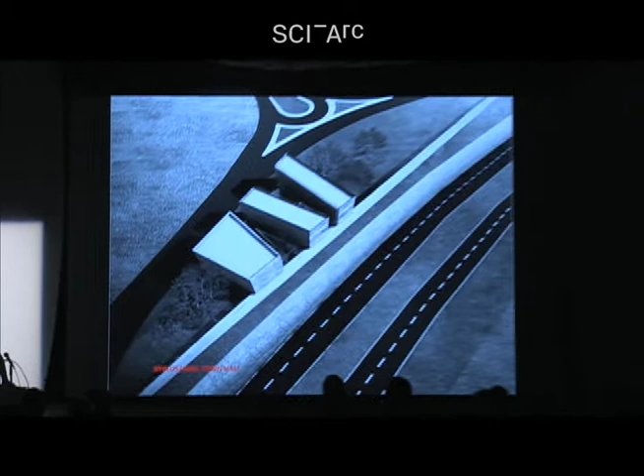In 2012, we won a competition for the design of the town hall of Byblos, a city just north of Beirut. The competition was open, it was anonymous, and it was in black and white—because the jury, consisting of deans of different universities, decided that in order to make it a fair competition, and fairness usually means equity socially and economically, printing in color would be expensive, so making it in black and white would allow everybody to participate. Indeed, it was an unusually popular competition.

But what I would like to do today is describe how the building went from black and white to color, and how it went from being a project to becoming a building.

Along the way, I would like to reflect on how a building relates to a larger practice, how a practice evolves building by building, and how the premises of such a practice are incrementally articulated and revised to solidify slowly into something like grounds, as perhaps the only certain grounds for practice.

Architecture itself provides the image of stability and permanence, but set in uncertainty, architecture becomes a stabilizing presence, or to borrow from Paul Bowles, perhaps more like a sheltering sky. Its success is based on how it calibrates its attachment or detachment from the earth, how it times its anachronisms, and how it measures the displacement of what it proposes as forms of space against the forms of life, in order to contain them, but also transform them.

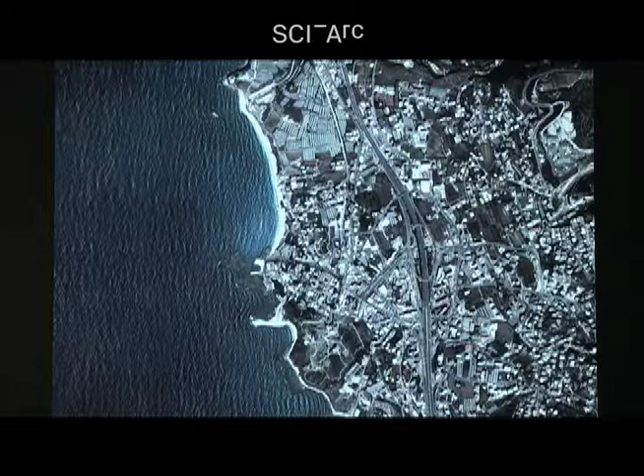For us, working in coastal cities along the Mediterranean, especially in Lebanon, has been quite frequent, and it has always brought with it exceptional and sometimes very difficult site conditions. Sometimes we were involved in the selection of the sites, but the choices were not always ideal.

One such difficult condition of site was the housing for the fishermen of Tyre, a historic city, World Heritage Site like Byblos, a peninsula along the Mediterranean, where the fishermen were forced to move out of the historic city in order to get better housing. They formed a cooperative and built their housing along the edges of agricultural fields. I was involved early on, so I got to help in the selection of the site, but the choice was mostly in this area.

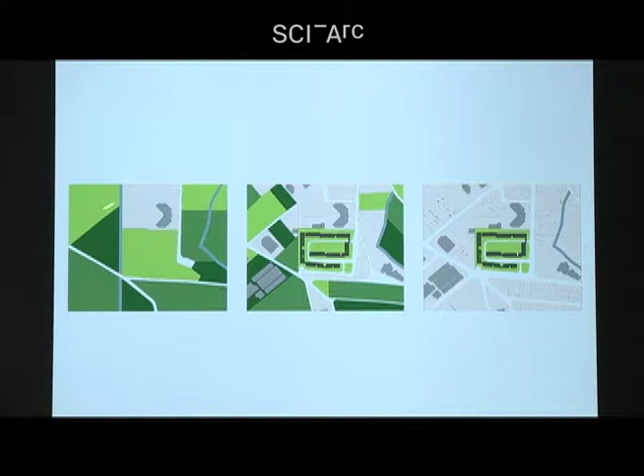In this case, we worked with the planning authority to go from the tobacco and radish fields that were there to a project that would be planted as a precursor to future development they were planning for the area. The hope was that the building would capture the grain of the agricultural fields long after they are replaced by buildings of a very different size and grain, but also create moments at the intersections of public activity outside and common space inside that preserve, in a way, the grain of the agricultural terrains.

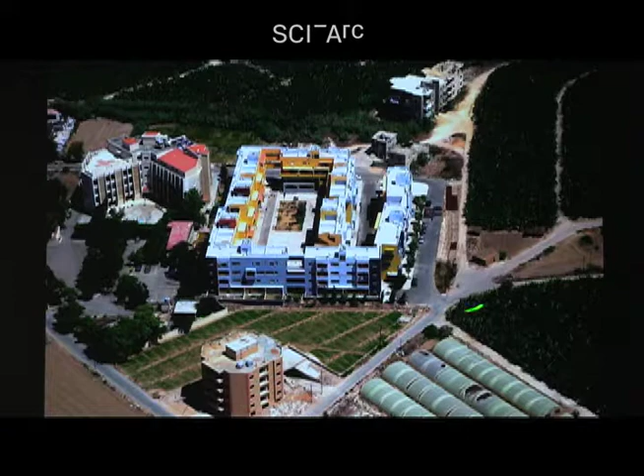Somehow the conditions around the site remain the same, with some development precariously growing everywhere, but the road network that was planned has yet to be developed. Even though we understood the space to be a common ground for the community of fishermen and the neighborhood around, it has yet to live up to that expectation.

The shop around the corner works quite well in capturing crowds from inside and out. The space inside has become more of an activity for kids because they're quite well connected, but really the better social activity happens in the gaps, the interstices between the buildings, where the fishermen hang out, mostly in the afternoon, preparing for the fishing at night.

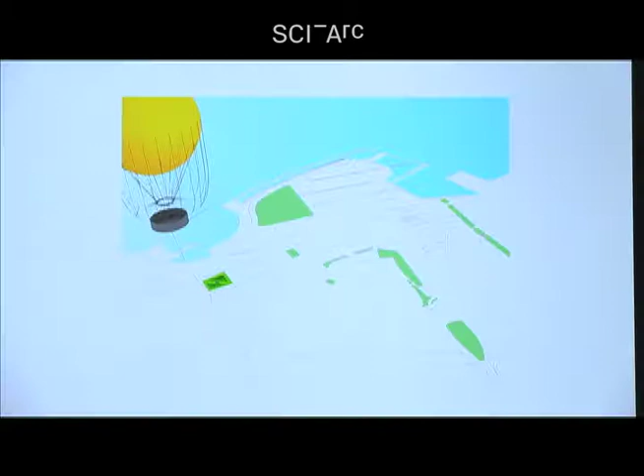Another moment where the site selection was very difficult was for a temporary park for a balloon landing on the edges of Beirut. Here we were given a choice of several sites. These would be temporary, for activities like cycling and horseback riding, as these parcels were being built and turned into towers.

On this site, for example, now there's a tower by Herzog and de Meuron going up. But the idea here again was that we would capture the possibility of public space for a short period of time, even though it's temporary, and create with the slope an articulation of the geography of the site that would highlight these difficult conditions, the idea of a layered earth, and the possibility of pulling in crowds and creating a big public space. For a brief moment of time, that worked.

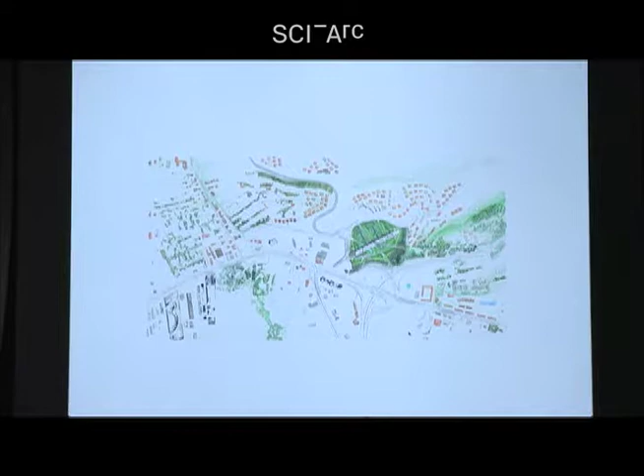But somehow, even here, the conditions of publicness were quite vulnerable. It's a vulnerability that I carry with me as a kind of fear in the project of Byblos as well. In both projects and in Byblos, there's also this tension between the ground and the building on top.

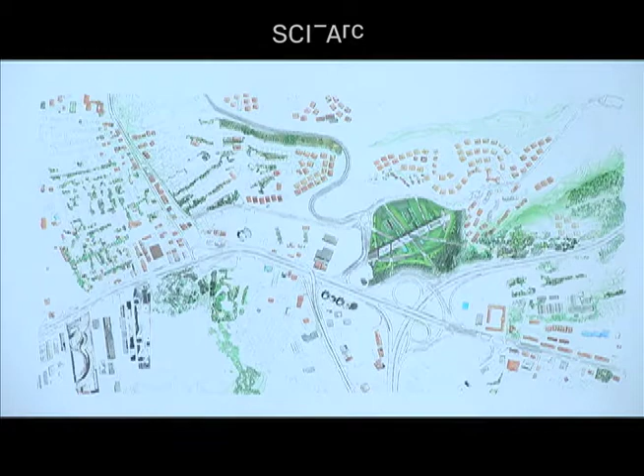In this competition for Istanbul, what we ended up doing was try to exaggerate the loose connectedness on the ground with a series of axes that link to the different communities, cutting into a mound at the base, whereas the high-rises created an axis much more connected to the distant geography of the Bosphorus and the Golden Horn. So these two layers, a ground that is connected and a set of towers deliberately connected to a distance and disconnected from the ground, was the play that we did here.

The conditions of the ground in Byblos are even more challenging. The historic city is facing the Mediterranean. Byblos is known to be one of the oldest inhabited cities in the world, probably the second after Damascus, continuously inhabited. And when the French were in Lebanon during the 20s and 30s, they uncovered a lot of archaeological finds.

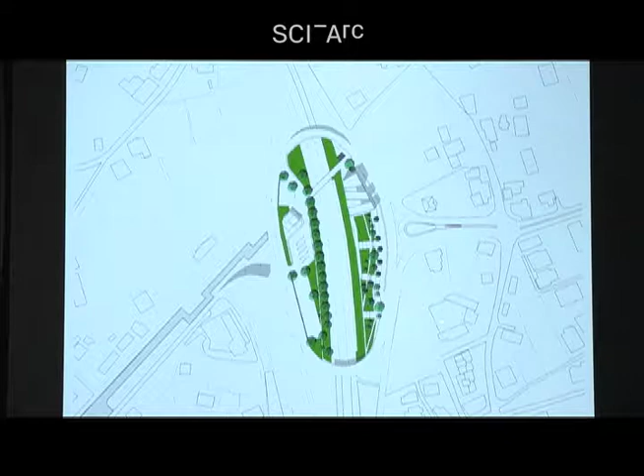For the competition, the volume was pretty much the same, except that this middle piece was rotated differently. We opened it up more this way because the mayor wanted to have his office facing the fortress, and then the afternoon sun was actually quite convenient to bring in indirectly from the west.

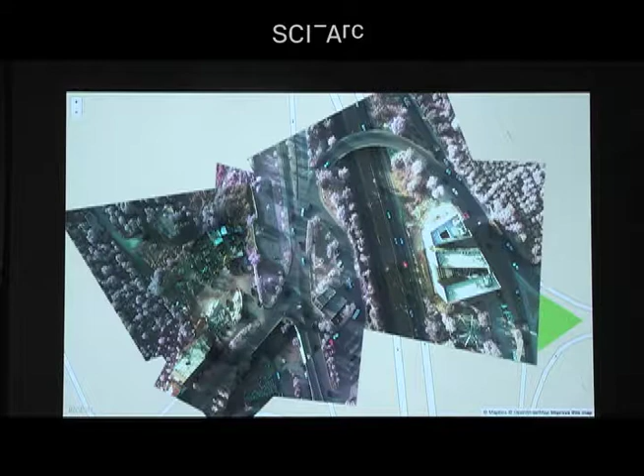But the site conditions have come back to haunt us because of the reality of having to bring cars in and out, connecting to tourists. One of the blocks became a museum in the process, and we've had to deal with the city bit by bit.

We did not know the client, and the client did not know us. So when the announcement was made, we had to meet with them on a regular basis.

The Municipal Council of Byblos is a very young group and a very active group. Sometimes the activity takes them in too many directions.

When I stand here, can you hear me? Am I okay here? No? Should I go back there?

This is the mayor. He's hardly 40, and the profiles of the members are relatively young compared to municipal councils everywhere else in Lebanon. Believe it or not, the women's representation is relatively high—this is just one woman on the council—but considering the rest of the country, it's quite open.

They were ready for action, and they came back with many suggestions. They realized full well that the Ministry of Public Works gave them this piece of land because they could do nothing else with it. But they really understood that locating it there would be a very good bridge between the two sites, and the happy coincidence of alignment with the Cardo was very important for them.

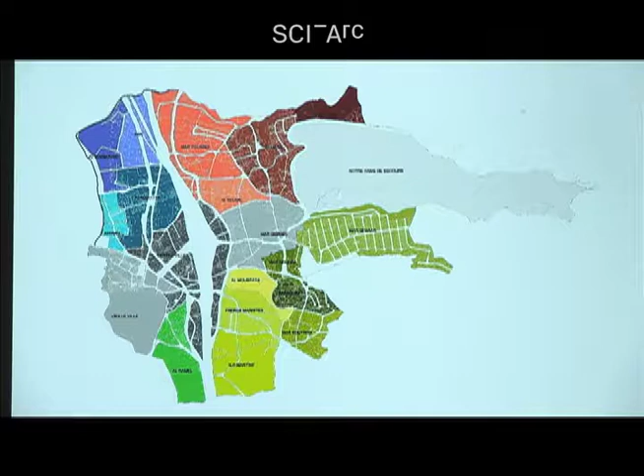So this is the group of municipalities of the region coming together to say, we want a regional transport plan, let's do that. These are the documents we're working on right now with the municipality and with Rockefeller—an initial one is simply to help clarify the clear connection north-south, Beirut to Tripoli, along the Mediterranean.

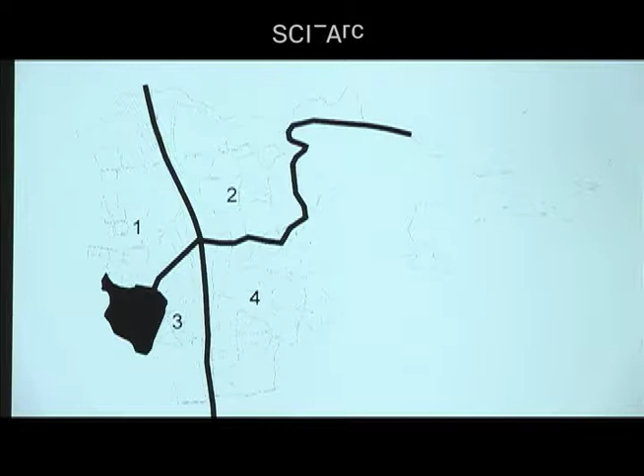And east-west into the hinterland and the suburbs, trying to improve the hierarchy of the streets because they're quite messy, by highlighting the primary, secondary, and tertiary roads, and then creating conditions of connectedness across the highway, since it's a major breaker between the old city and the mountains, by creating this loop and highlighting its role for public transportation.

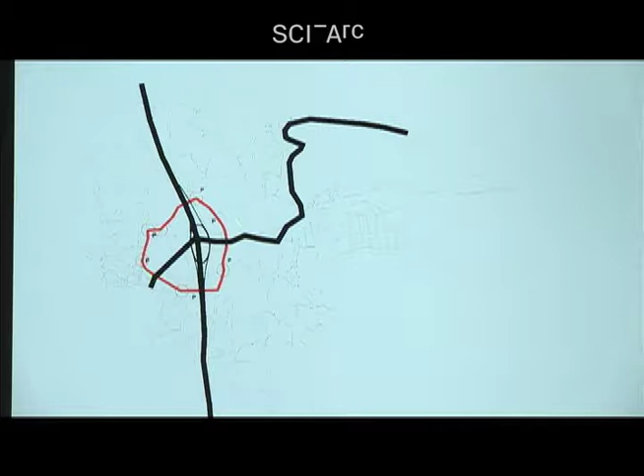Here we're working with them right now to get the buses that they use for tourists off-season to work as a loop for carrying people around, and reusing some of the coastal areas and railroad tracks for pedestrian links.

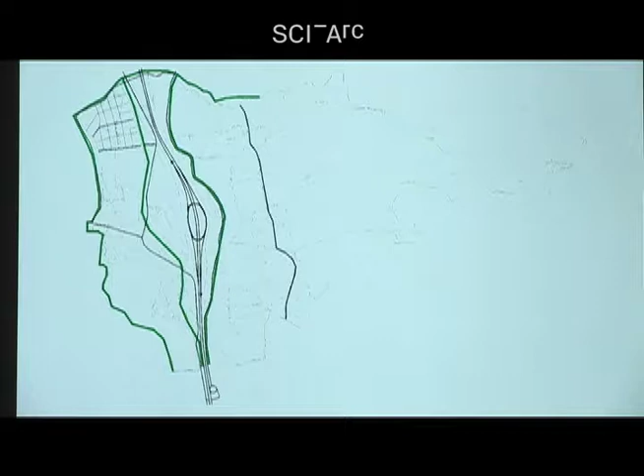And then also using the north-south walkways, which are still pedestrian, for connection, for hiking, and for connections through introducing other forms of tourism into the site. The big picture is yet to gel, but this is how it looks more or less now.

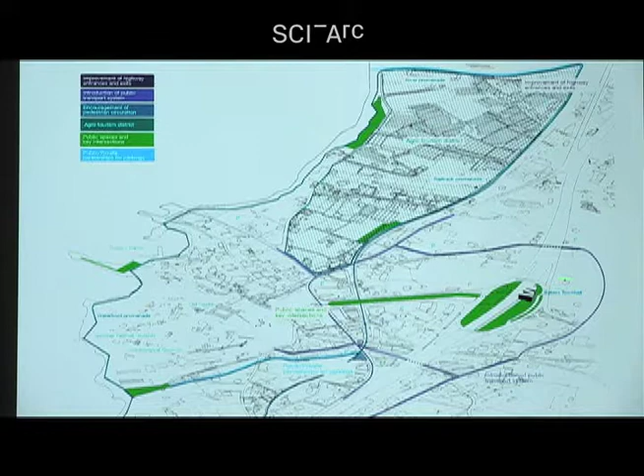The discussions with the Rockefeller Foundation are still around questions of participation and deliberation processes within the city, but these issues are still on the table. And they are important for us to keep on the table because for the operation of the building itself and its connectedness to the larger city, many of these questions have to be addressed.

And then this is the highway frontage question, which is still in front of us. But perhaps the most immediate impact for us on the town hall site is the clarification of these two secondary entrances. As a way of releasing traffic from this area, we proposed, and hopefully it will begin to happen, that these two entrances get pronounced more as you're approaching the city from both sides, so that not all the traffic happens here. And I'm hoping that in the coming few months with the Rockefeller, we will be able to change that.

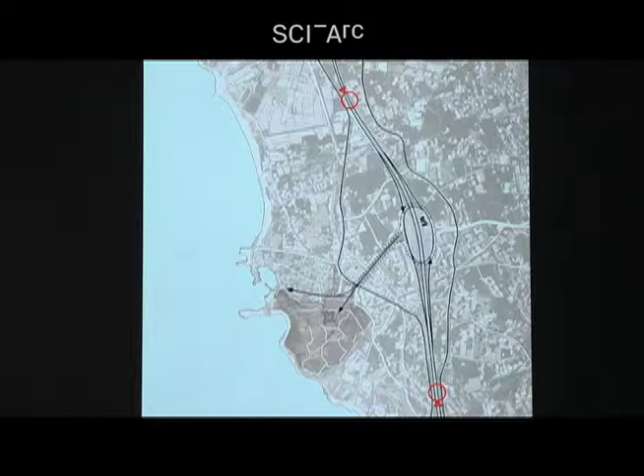Also, with the growing interest in agro-tourism, we're trying to link all of that to the northern side of the city and to its preservation, which is still now agricultural fields, but very vulnerable to development.

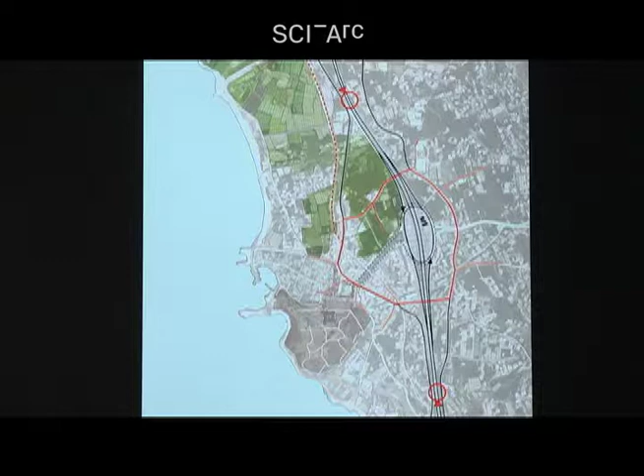On the site itself, in terms of approach, you would drive in, come along the edge of the building, and then come back out. We're putting some parking here, trying to convince them that it's better to put all the parking on the other side, and then create a noise barrier along the highway that would go slip under the building and come out the other side.

And that would be an outdoor display next to the park for art related to the Alphabet Museum, which is here. Byblos prides itself for being the source of the first phonetic alphabet in history. The Greeks, in doing commerce with the Phoenicians, took that alphabet and turned it their own, and subsequently it became the base for all phonetic alphabets, including the Latin one.

And Byblos is trying now to incorporate in this third block an alphabet museum. I'll get to that in a bit.

So ultimately, the three volumes float over this wall. As you're driving up and down, you see them ambiguous in size because of their flatness on the outside. Not clear what scale they're at.

But their main role is to link the two sides together. Their repetitiveness suggests some institutional character, but their oddness, as a kind of attempting to adjust to the irregular geometry of the site, points to the immediate conditions of the site and projects them along the axis and along the highway to a larger geography that they're on.

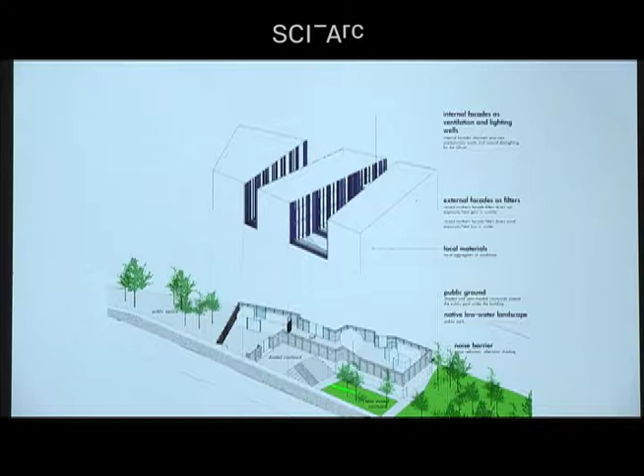Our main concern was to maintain the continuity of the ground. This is a public building. Maintaining the continuity of the park through the building was quite important for us. And creating a plaza at the end, which will work as the reverse entrance to this multi-use building after hours, especially from the museum.

And the 3 volumes share the lobby and the control area, and many of the activities that you would do for paying a parking ticket, paying your taxes, can happen in the lobby. You don't have to go up.

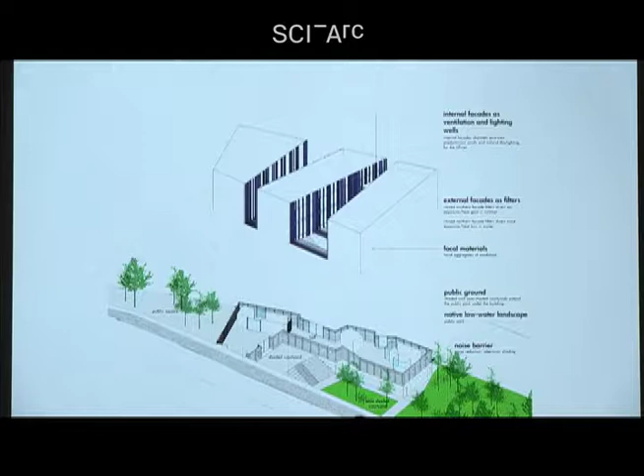For me, this was a little bit unusual because for the longest time, I've tried to interfere in program. Having worked a lot with non-governmental organizations where the programs were always in gestation as you were defining what the project is and raising money for it, I've always tried to figure out ways that we can save on money and be creative with the building by being creative with the program. In this case, we refrained from it.

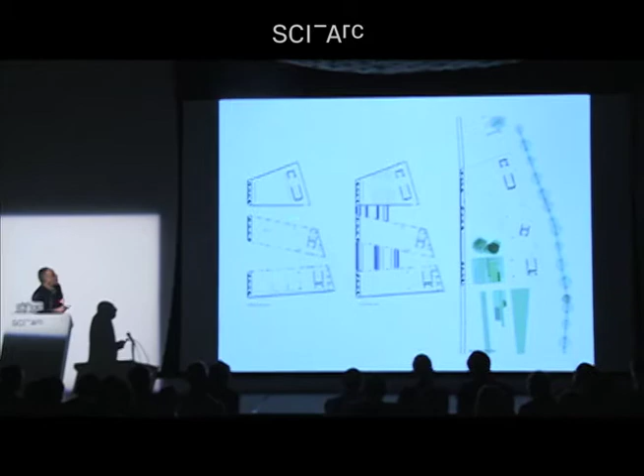We kept the ground open with the lobbies, and then the 3 volumes working with the activities inside them. In this case, there was an iteration early on that it would be an auditorium, but then after that it became a museum. And these are the plans almost as built.

Please keep these columns in mind. They will come back to haunt me and haunt you later on.

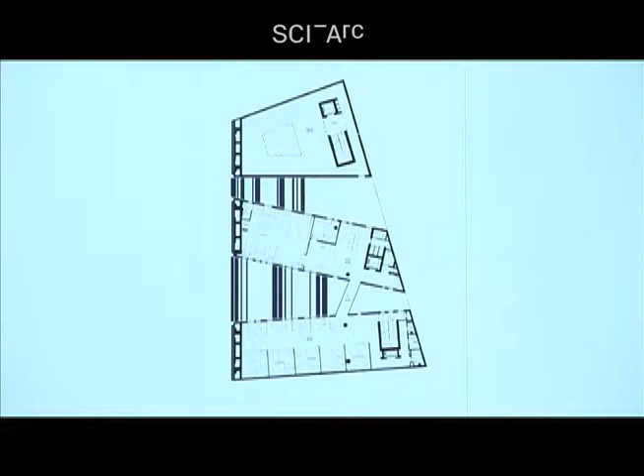And now this is the plan showing the museum component. And this is the mayor's office, which has also been a big fight because I had initially understood it to be small, and slowly it started growing and becoming quite exclusive. And that's the roof plan.

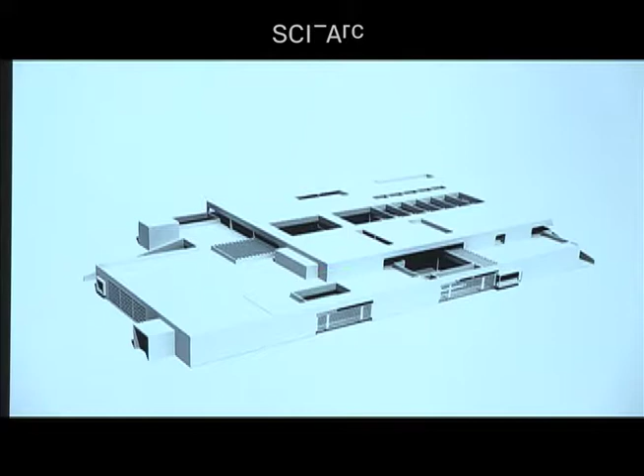Working with NGOs, this is an agricultural center in North Lebanon, which is half finished, as is always the case with NGO projects. This is the one where I tried to save on space by making the different program elements share spaces. To give you a sense of the complexity of the plan: a dairy factory, a public service entrance, showroom and shop for selling produce, an industrial teaching kitchen, a technology school for helping farmers with different skills.

All of these had to share the same space, including a nursery on the upper level. So in working out the program, in order to make it smaller, we came up with a series of diagrams of how these open spaces outside can be used for spillover, including for instruction. If they worked out the schedule correctly, they could save on space. Well, that did not work. Many of the outdoor spaces were colonized by the activities inside, and they became quite exclusive.

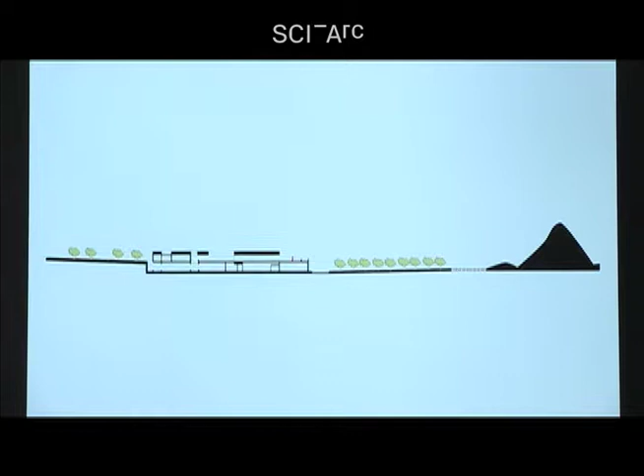Until today, the cohabitation among these different programs is quite uneasy. The thing that remains is probably the sectional clarity of this building in connection to the terrain, occupying ground on the lower level and occupying ground on the upper level, creating a very strong horizontal connection across the olive fields to Mount Lebanon in the background.

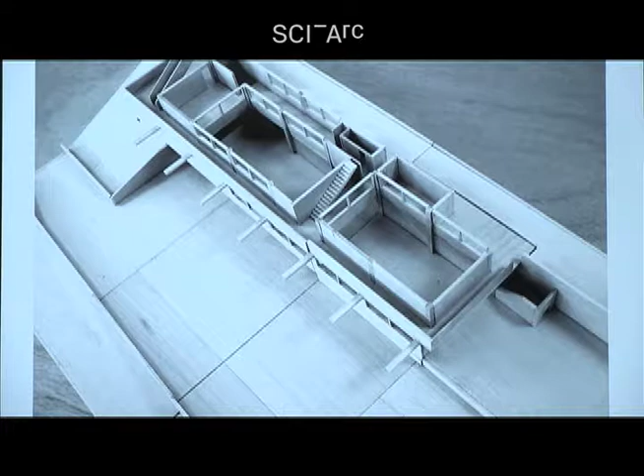Even though the building is not finished, that view is pretty much there. We did the same with an olive oil press, where we thought that by creating a walkway for the farmers to walk around, we would be satisfying the hygiene requirements of the olive oil factory, but the farmers have refused to abandon their olives.

They wanted to carry them through because you have to be involved in the pressing process. Except for these rather antiseptic pictures, the place right now is a complete mess, with the farmers walking up and down and the hygiene standards quite radically compromised. But the idea was that it would be like a car wash up there.

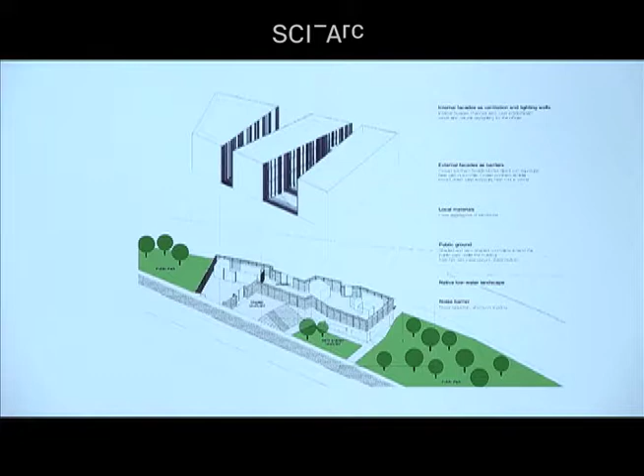So back in Byblos, we decided that programmatically we would stick to what is given, and that here again we would preserve mostly and enhance the public space dimension of the project. We didn't want to try to interfere in the program. Until today, the program, as I will describe, is changing.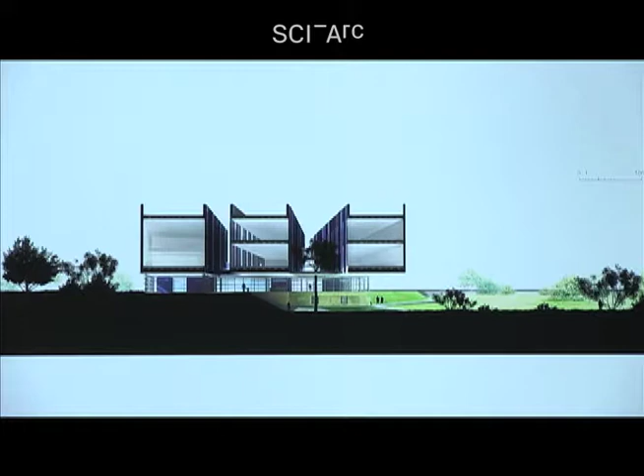This condition of the public realm being the one that holds the project together, we tested in the project of the balloon. But in the balloon, as with Byblos, if you think about it sectionally, the program was interpreted in a very simple way: a big open space in the middle to capture the public realm, but then a perimeter—in this case underground—that would house the different activities and programs, which would be given the opportunity to spill out, helping to interpret and reinterpret the space through the intensity of the edges around it.

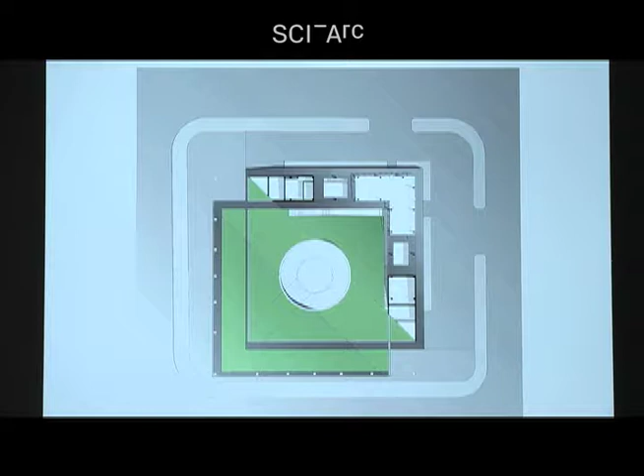One could talk about this intense-edge open space as a courtyard condition, and it happens to be the case in the balloon, but it is intercepted by a sectional slip.

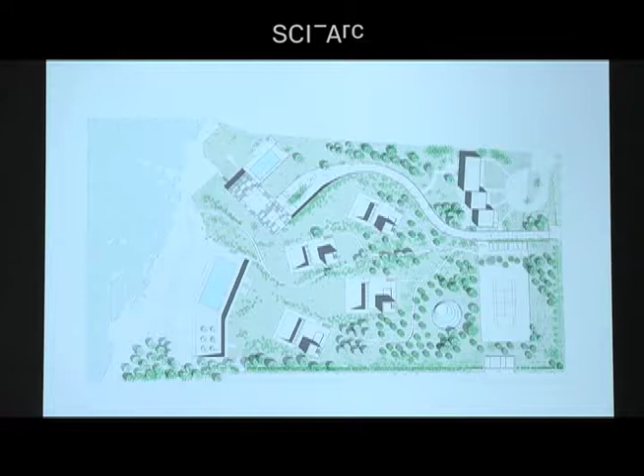That same condition we're now working on with this series of villas just north of Byblos, a 10-minute drive—a series of houses for a family that we're calling the court towers, because they're a combination of a courtyard and a tower. Here again, the idea is interpreting the program not by interfering in it, but by exaggerating the common areas against the support areas, which are pushed to the perimeter.

And here again, because of the nature of the terrain, the houses are embedded in the landscape, and the section is what connects the different levels.

In this particular case, the perimeter works as structure, as program, and also as a barrier against the elements. There's a service way here for insulation and for support of the mechanical systems, and then all of the program is pushed to the side, creating a big clear span in the middle.

The tower itself operates the same way, where you have a barrier to the sun from the east and the south with these programs, and then the space of the bedrooms is completely open on the side, behaving like a balcony.

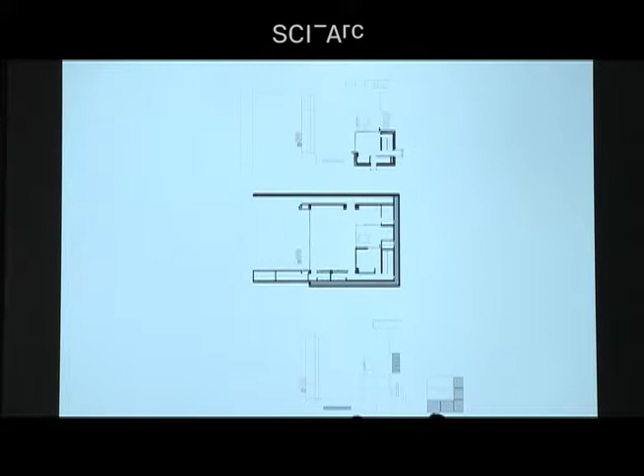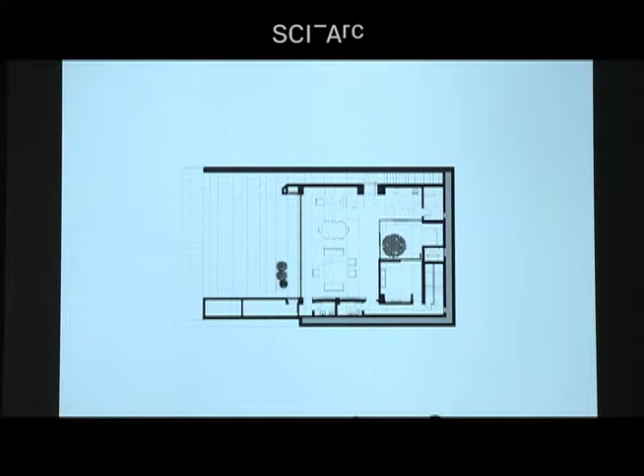That's the plan: the courtyard and the tower. Actually, even this element is not structural—the tower is held from these sides. That's the model.

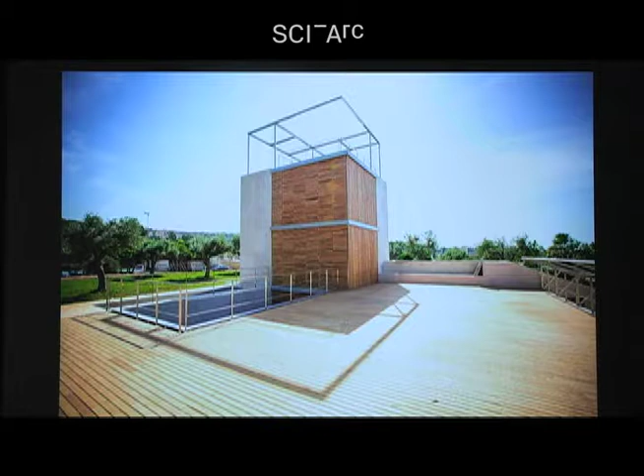This idea of the intense edge is taken further in the way the facades themselves work. The tower unwraps to reveal that solidity in the void inside, and this condition happens along the pool edge where you see the inside.

Here, the outer wall of the building is actually a thick inhabited surface, inhabited with the bathrooms. That window you saw is actually the sink, where the side windows bring light from the side, but the mirror reflects the garden back into the bathroom. And these closets are both closets, filling in the poché of the facade, but they're also a cooling and heating system for the house.

We're relying on a gravity wall system which takes cold water out of the sea and uses a kind of refrigerating radiator behind it. So there's no air being pumped - it's all a very passive system. Hot air comes in and cold air comes back out, and the reverse happens in the winter.

This is the condition of the edge of the pool as well, where this thickness becomes inhabited with different activities, but otherwise the common space is there.

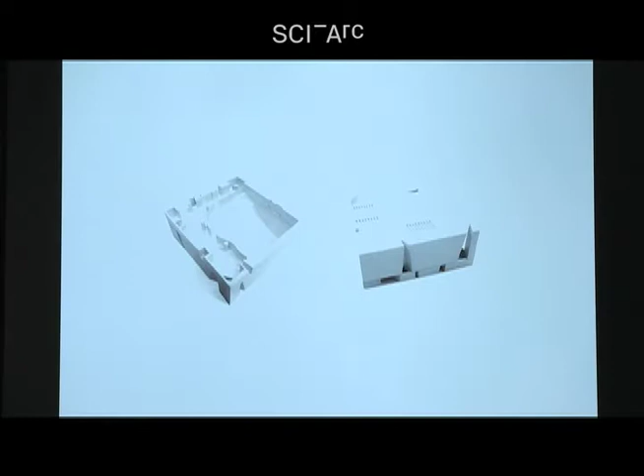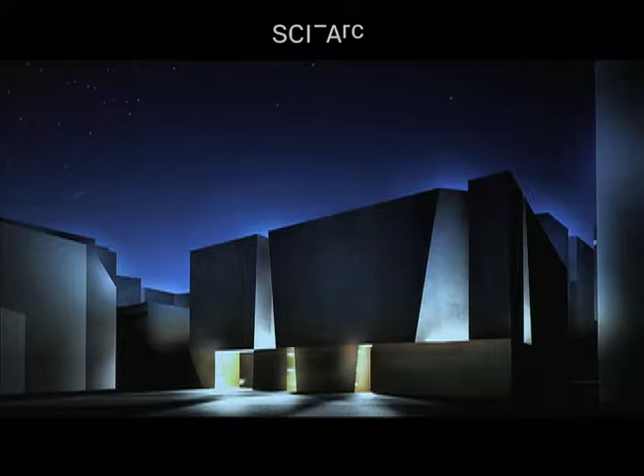We did the same with this mosque competition, where you have an intense edge and an open interior, which is reflected in the plan. The exterior gives a certain massiveness and poché, including the articulation of the minaret. This project happened at the time there was a big controversy in Switzerland banning minarets. And in Qatar, because these were daily mosques inside neighborhoods, they didn't want the minarets to be too pronounced, so we created the minaret out of the volume of the mass by just chopping the corner open. But then the interior is a completely large open space, scooped out and carved out by the volume.

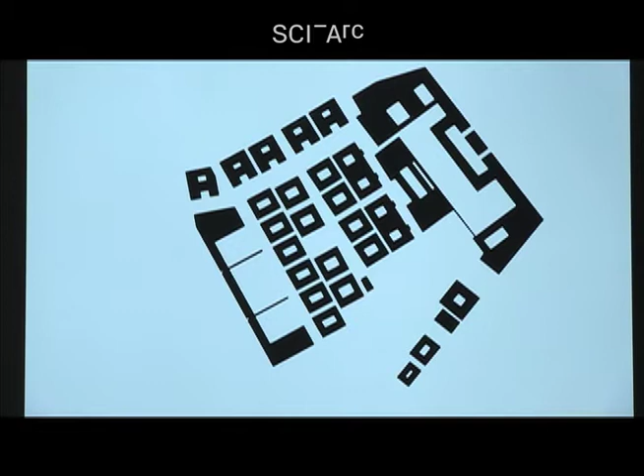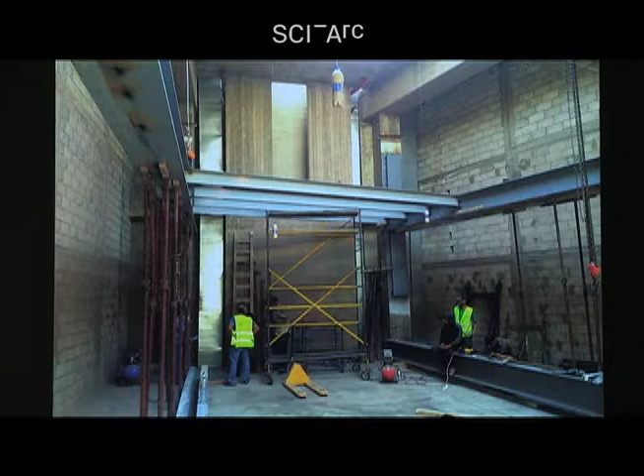In many ways, I feel we made the right choice in Byblos in terms of not trying to intervene in the program. The uncertainty of the different elements and their flux is still today quite bothersome. This is the museum volume, and what we did as a later intervention is create an opening for light from the top and create a mezzanine for the activities. But interestingly, we are still waiting for the objects to come. We're building ahead of understanding how this museum will be programmed, because there are very few pieces that can be brought here, so it has to become more of an interactive museum.

And here we are building without the curators, without the directors of the museum helping us. But so far, at least the public realm, the area underneath, is preserved. So I'm hoping that I made the right bets.

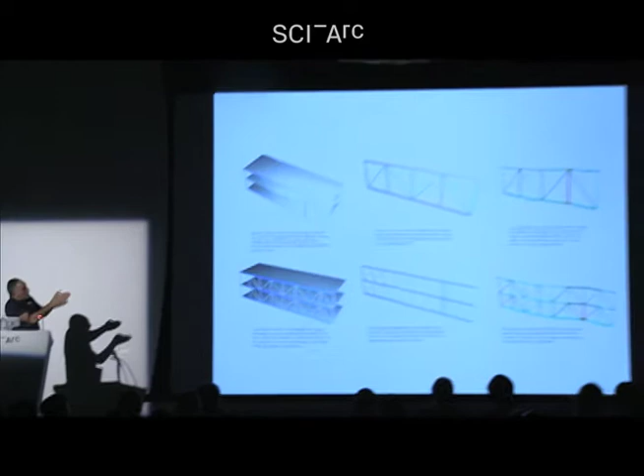One of our aspirations for this project was to make the structure expressive of the way the program works, but also the way the volumes float - 3 space frames that would be floating on top of the wall, supported on both sides by the core on one side and the noise barrier on the other.

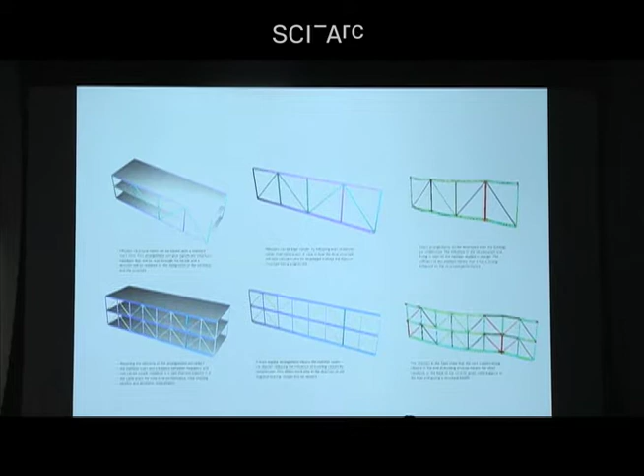These were initial studies that we did first with AKT, but then we realized the budget was so limited we had to work with a local architect. We moved from this idea to the idea that the structures of the 3 buildings would be hanging, again expressing the floating over the public passage.

That did not work. They were very afraid of it, and they thought that not only the cost, but the labor involved would be too intensive, especially on the edge of the highway. So we did a very simple animation to explain that, and we actually posted it on YouTube because we wanted everybody from the city to be involved. But it actually scared them more than helped, in the sense that it showed them how elaborate this whole thing was.

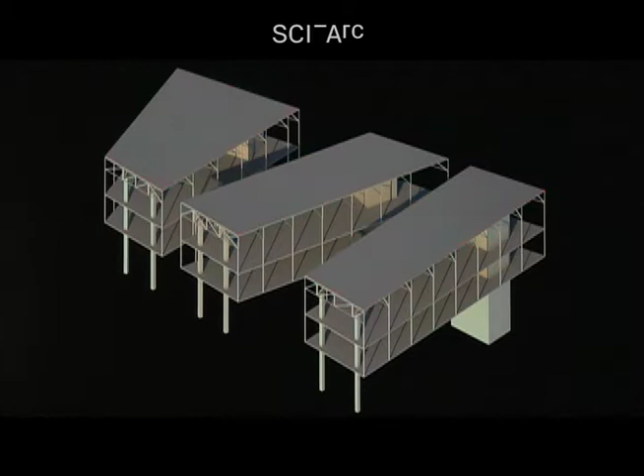So we had to abandon all of this, even though till today I feel it would not have been much more expensive or costly than what they ended up doing. This idea of connecting structural experimentation with the program or with the form has been something we've been trying to do for a while.

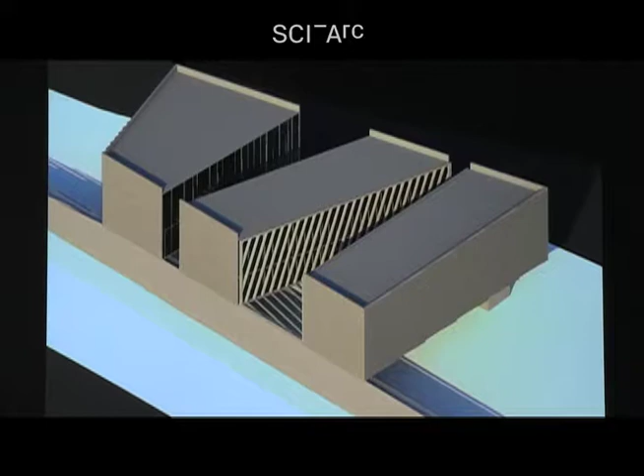If you think about the programmatic strategy of pushing things to the perimeter, it constantly creates the challenge of big spaces and big spans. That has been a yearning, I would call it, because it's not yet fulfilled in many of the projects.

This is, again, with Adams Kara Taylor, the competition for the Zorlu Center in Istanbul, where one of the main principles of the project was that the lobbies of the towers would be lined up on top of the main spine of the shopping center. So the buildings were sitting smack on top of the shopping center.

The only way that could work was by transferring the structure of the building to the sides, with the passage happening underneath, and the lobbies hanging in the space, accessed from the sides. But we did not win.

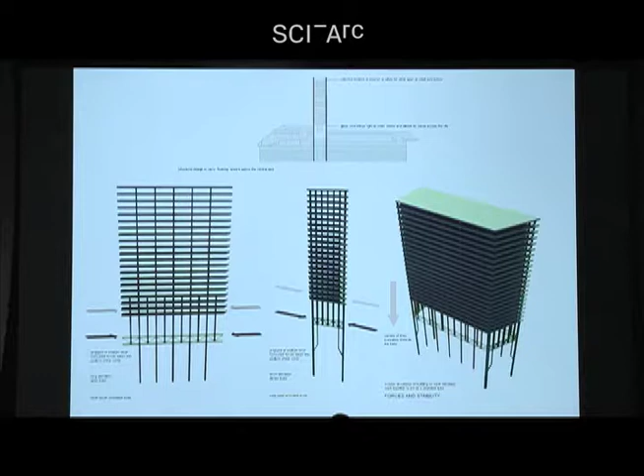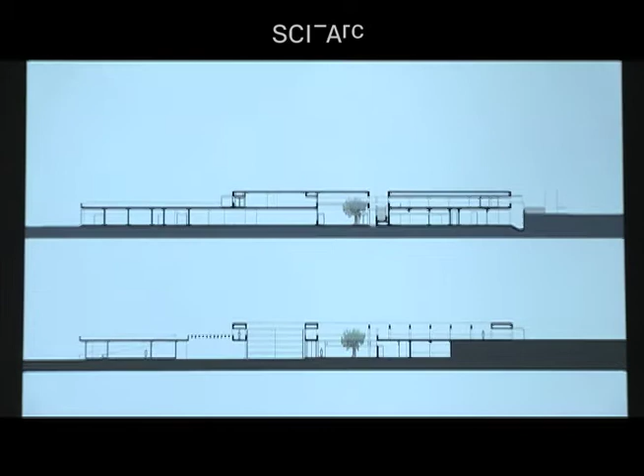In this particular project, the Center for Agriculture, we also tried to produce bigger spans, but that meant just bigger and thicker beams and concrete. When we started building, we realized that the big spans over the covered courtyards were creating very dull, flat surfaces.

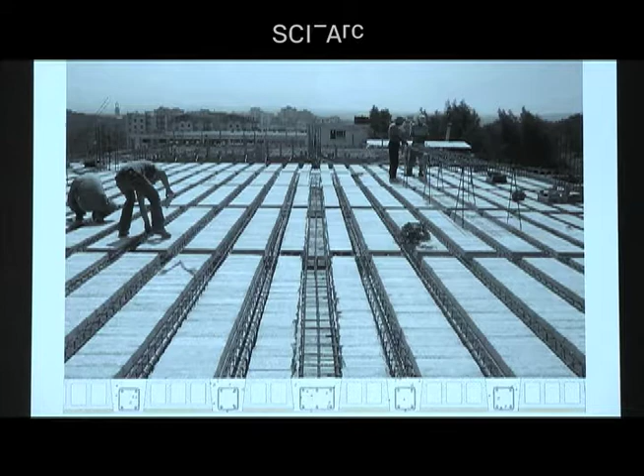The only way around that was, when we were building, to understand how we could articulate the surface from below. Using this rebar-reinforced hourdi block system, a very traditional construction system, we worked with the contractors to lift the hourdi blocks from the rebars. When you remove the formwork, you get a crenulated surface. This was our simple contribution to the articulation of a big span.

With a balloon, we also tried. I really wanted that fold in the ground to allow for a structure with big beams that would hold it open. But the budget—not only of construction, but also of the demolition of the building—was very prohibitive. We had to anticipate how this building was to be destroyed.

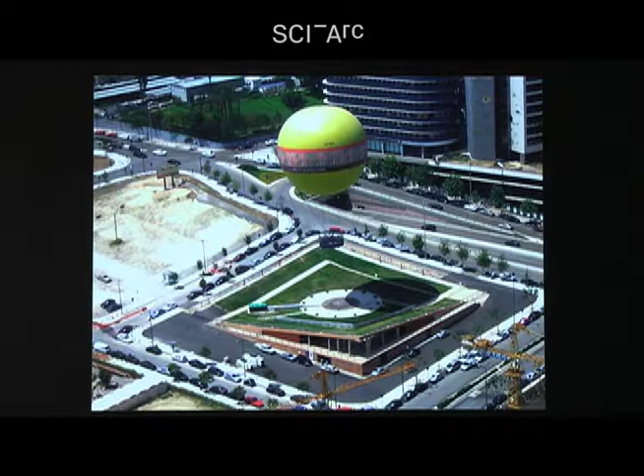So we resorted to the use of round columns, and the budget was so low that we initially had curtain walls anticipated, but we ended up using PVC curtains—literally curtains—because we couldn't afford curtain walls. The round columns were meant to stand for something that would not be there. So every time I see pilotis these days, I think of them as not there, just out of despair.

So we had to come back to the reality of the budget, but also the psychology of the construction. And here we reluctantly accepted to plant columns just along the curtain wall, the glass wall of the lobby.

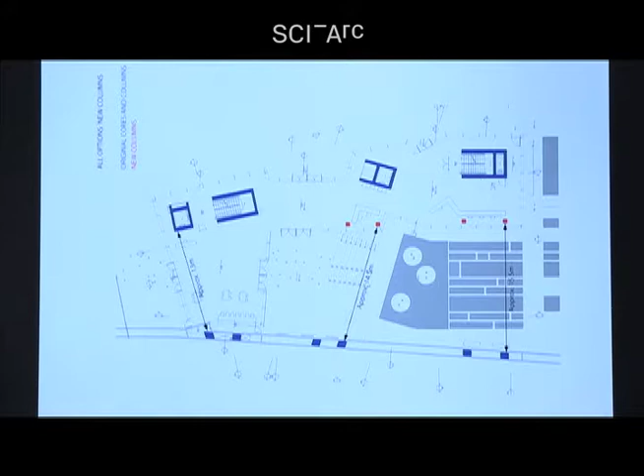With a few columns—four of them—we managed, with the help of a good structural engineer, to solve the problem of the span. Initially we thought they would still accept the idea of big beams on the roof, but that required carrying everything up straight and hanging it, and they were afraid of that logic. So we came up with a system where the slabs themselves would act as structural beams, continuous ones, and we abandoned the hanging system.

These are the columns planted. And I have to say, they're not that bad after all. These are the columns sitting in the space of the office. And if you paint them white, they do disappear.

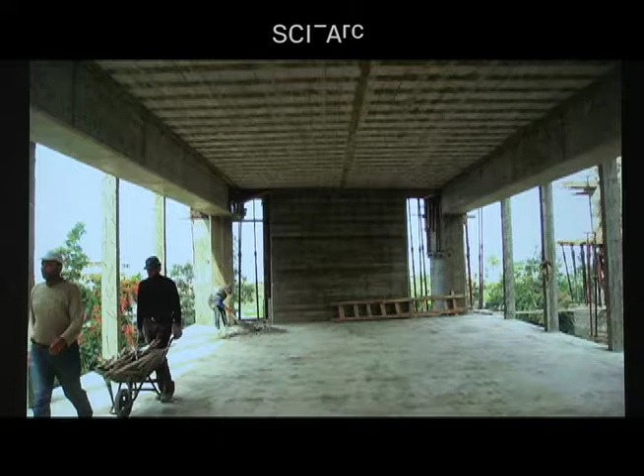This is the box of one of the buildings. This is the main structural element facing the highway. You can see these small ribs that are there to help hold the walls and the lintels. For that brief moment of time, the building did look like a space frame. So we liked that picture.

But time came to fill in this space and to actually interpret what we had in black and white as a surface for the building, in actual material and actual color.

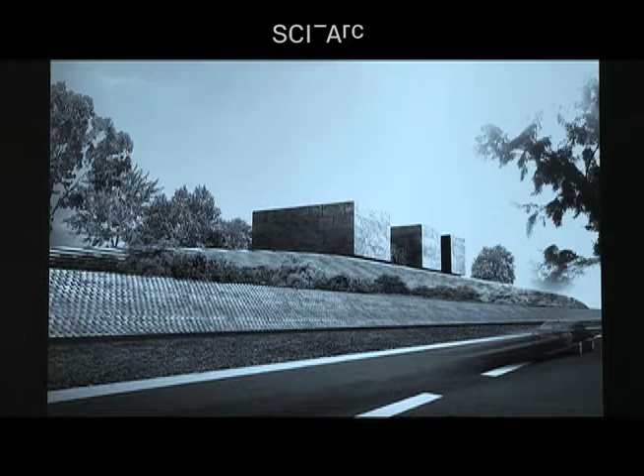What we had submitted was a kind of shorthand in Photoshop like this. The lower wall is the existing planter wall, as a retainer wall. The upper wall is the noise barrier, and then the three boxes—just with the shorthand of Photoshop and the shortness of time that we had.

We took sandstone walls from the city—sandstone being the official stone of Byblos—and we plastered them at a very different scale than one would expect. If you look at these, each stone is almost three-quarters of a floor high, which you cannot find in sandstone.

But time came to interpret the material, and I actually really don't like sandstone, for different reasons. One is it's not a very reliable stone. Its color is unpredictable, it crumbles very quickly. And even in Byblos, even in the whole country, it's never been meant to be exposed. It was always the fill material that you would plaster over, or sometimes even use limestone to cover it, especially on exterior. So we thought that maybe this is an opportunity for us, as we're working to develop this idea of ambiguous scale, to try to make big panels that looked like stone but were not stone.

In terms of their coloration, we were also not sure whether we would stick to sandstone or do something else. Now, coloring is a difficult thing, especially for us as architects. And there's a certain arbitrariness to it which we do not like, even though we accept arbitrariness in many ways. But when it comes to color, somehow we cringe, we don't deal with it. I've had to deal with this challenge in another project, which is the housing for the fishermen.

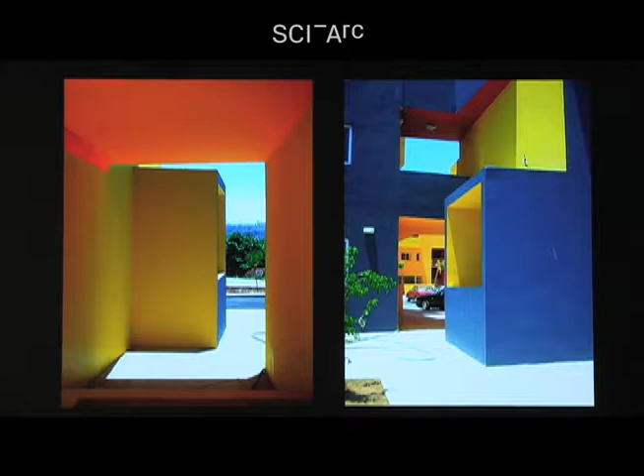But most importantly, it helped hide the mistakes, and it does help in hiding a lot of the plastering mistakes. There's a corner where you're looking at the inside. This is the back, these are the kind of gaps between the forms. And this is the same corner from the inside and the outside, and that's the interior with this grouping of forms.

We use the same arbitrary coloration on the Strada Novissima in Venice Biennale about, I'm going to say, 5 years ago. And here we wanted to adhere to the facade but recede from the facade. And we used the color blue as a way of helping it float, but also to play this ambivalence between it being aligned and being pulled away from the street.

But in the case of Byblos, the coloration was one to be probably more in tune with the materials themselves, meaning that it had to draw clues, like coloring old black and white photographs, from the materiality of the objects that one is working with. Hints, references to a certain naturalism, not necessarily accurate, but manipulating those. So, for example, this photograph of Abraham Lincoln, we know to a certain extent the color of his skin, we know that his shirt was white. Whether his bow tie was really red or not, I'm not sure there's a science that can reassure us that that was historically correct. Maybe factual descriptions can do that, or particularly that kind of red.

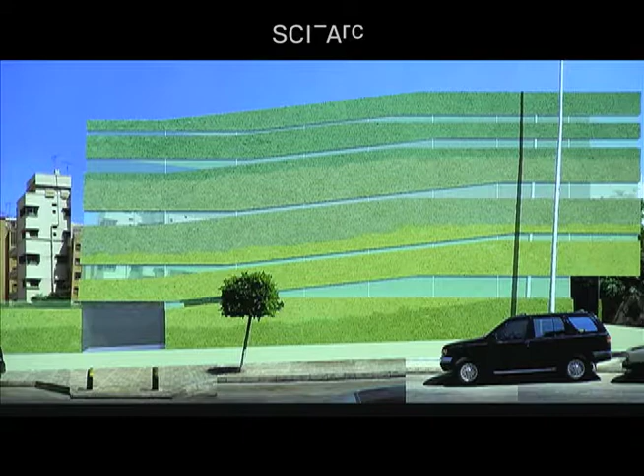And we had played that game with other buildings as well. This was a branch library that was never built in Beirut, where we worked with the sand color to give the concrete facade different hues, so different aggregates and different sand colors to transform the coloration of it. And with the balloon, we actually worked with pigment that matched the color of the soil to enhance the idea of excavation and cutting into the ground. So the formwork of the wood, which is the same as the formwork of the concrete, looks like a kind of hatching into the ground. And we even used cement to color the wood and paint to color the cement so that they would begin to match much more.

Every which way we tried, the municipal council insisted you have to use sandstone. Not only did they insist, but they bought the sandstone and shipped it to the site and dropped it there. So we were, in a way, stuck with it.

They're discovering it under many of the barrel vaults in the churches, under the plaster. So they remove the plaster and expose it, but it's beginning to crumble and absorb moisture. But this has become like a national trend.

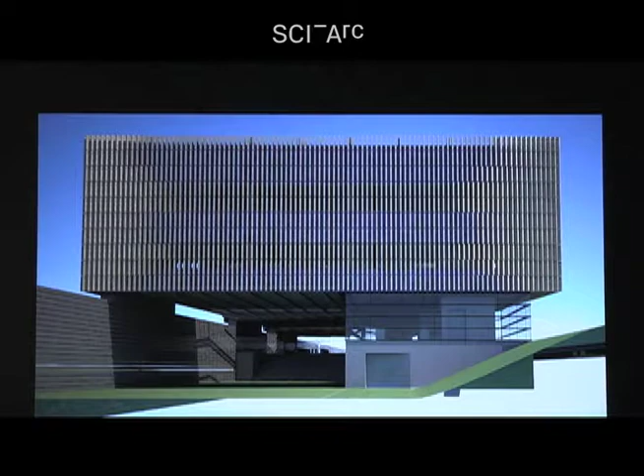We tried to run away with making it more porous, made out of different bands, but this would not hold, it would crumble. We justified it by the screens, but this was also exorbitantly expensive. It's kind of patterns that would work with the movement along the highway and shapes that would vary along the way.

But accidentally, I ran into a piece of stone, a very beautiful yellow travertino marble that we were buying for the bathrooms of the villas I showed earlier. The client of the villas did not like this piece of stone, but I thought the pattern and colors resembled very much the colors of the sandstone, except they were so beautifully organized in these bands that I decided maybe we can make the sandstone look like this.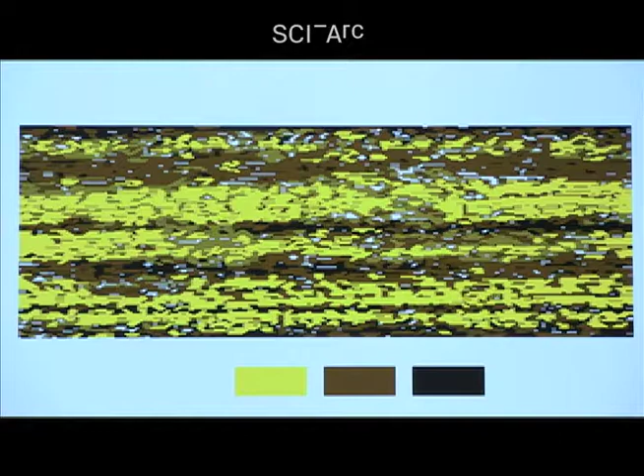So we translated this image into pixels and managed to achieve the effect with 4 colors, and then tried combinations with other colors to give it a vein, but we ultimately ended up with just these 4 colors. First, we thought we would distinguish between the cuts, but we managed with the 4 colors to achieve this effect.

They had given us big sheets of sandstone, about 40 by 60, but to achieve the pixelation, we cut them into very small pieces and distributed them by color. When you have a big sheet, it's very difficult to define which color it's in, but when you cut it into small bands, you can say well, this is light yellow, light orange, dark orange.

We also took the travertino sheet and stretched it in order that it would wrap around all 3 buildings, to create an effect that they are all cut out of the same block.

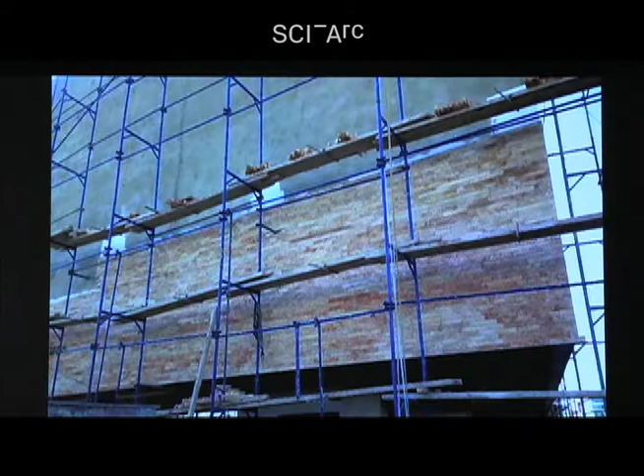We went to the site, and with the workers, we first cut a batch and then assembled them into different colors, built the scaffolds, painted patches of white paint to correspond to different shades, and with the construction workers on the scaffolds, some of them up there and the foreman down below, we started laying them out. Obviously there were some mistakes that we could fix, but once we got the rhythm right, it went very fast.

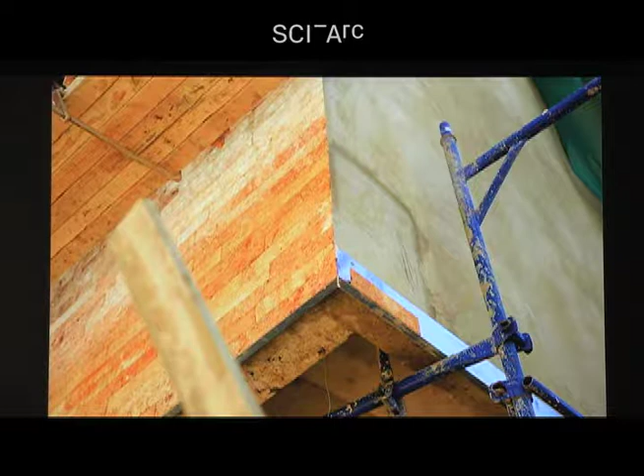Perhaps the last aspect of the building I want to talk about is this idea of inscription. When we presented the competition, the idea was that we would have trellis underneath the buildings and the same screen going up between the facades. As we tried to interpret that into material and budget, we thought maybe we could introduce, as the museum idea became a reality, some reference to the alphabet and the identity of the city as the creator of the world's alphabets.

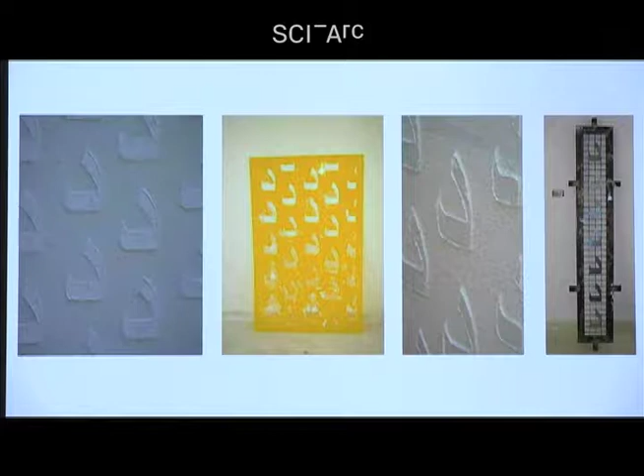So I went back to a bad habit—we all have bad habits. One of mine, which started as a child, was a love for writing on walls. It stayed with me because I liked the idea that the surface of a building can become a surface for expression by other means. There's also something beautiful about inscription, which I post-rationalized has to do with the fact that when you write, you either press in or emboss, and the writing process involves a hand—the hand that makes the surface, and the hand that inscribes from outside.

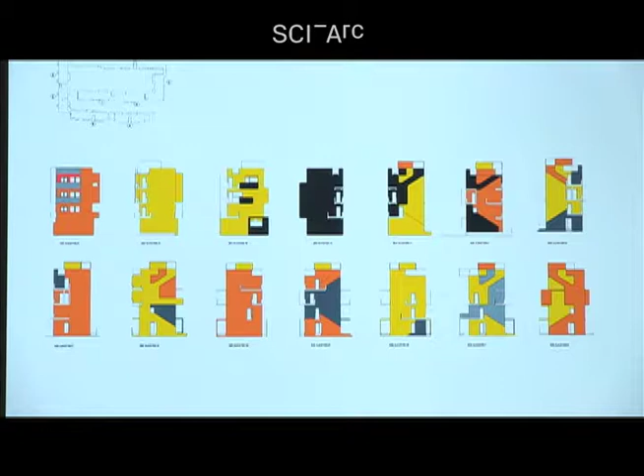But unlike ornament or applique, inscription tends to pull out from the tectonic of the building certain attributes and adjusts to them. In the housing for the fishermen in Tyre, initially it was supposed to be like this before it went into color. So we ended up holding the letters of the alphabet on the facades of the entrances of each building. In the grouping of colors, we tried to create something like an abstract hieroglyph associated with the project.

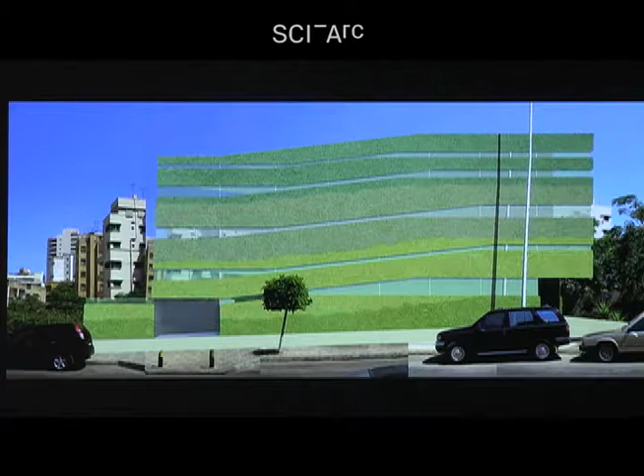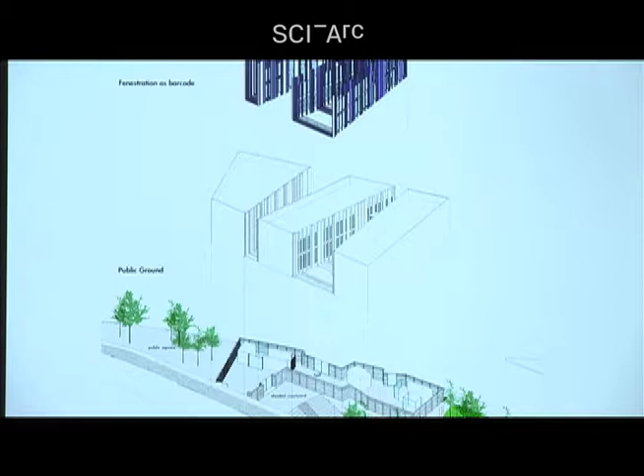But we had to act on Byblos. We thought that maybe if we juxtapose the initial alphabet with the barcode—since barcodes have become a kind of fascination for making randomized facades—we'd make it literally a barcode, literally the word Byblos, so that when you're driving fast, you can flash it with your app and read Byblos. I'm not so sure you can still read it, but the intent is there. Because it's oblique and distorted, the idea was you'd take that, carry it around to become a pergola, and it would wrap up on the other side.

Color again became an issue here, and I want to say not only color, but color and material. I do strongly believe that questions of coloration, and certain decision-making factors in architecture, do not always come out of the logic of the sequence of decision-making. They have to come from somewhere else.

There is no single source from which all decisions about the building can be made. We have to accept and entertain and celebrate the idea that decisions come from elsewhere, even if sometimes they come from fashion design. In this case, in looking at the texture of the stone, I was interested in figuring out combinations of color, but also of material textures.

I don't know if many of you know the work of Dries van Noten, the Belgian fashion designer, but he's a master at the combination of textures and colors, and really amazing palettes of colors that come together in his work. And I confess that I borrowed the color palette and the texture palette of Dries van Noten. Obviously it goes through many iterations, but that was the source.

Here you see the curtain wall or barcode facade made out of Alucobond Prussian blue, which I liked because it was not the immediate blue and it was not the blue of the sky, but it brought in a different kind of sky into the space. And with the bouncing back and forth of light between the two surfaces, it allowed for a certain depth, a certain interiority to be projected up into the sky itself.

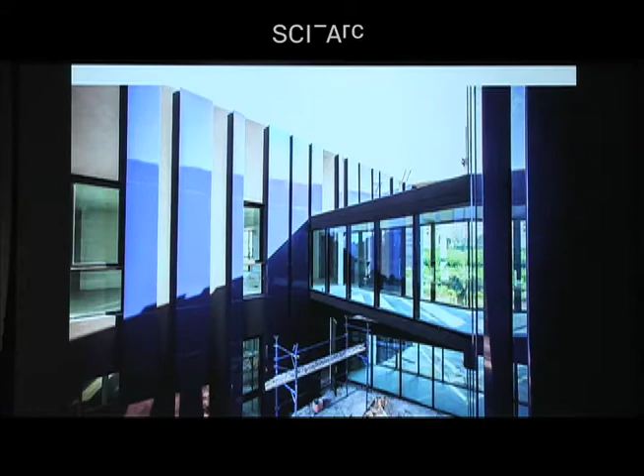The pergola. Now, all of us who know this obsession with making horizontals and verticals continuous know that it doesn't really work. Once the material changes directions, it changes character and behavior.

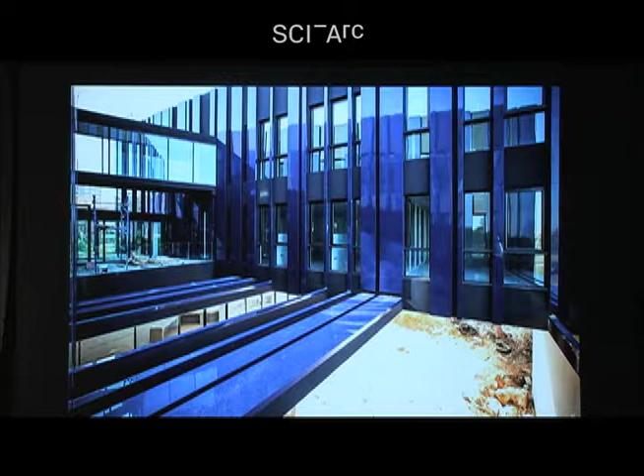More importantly, when you start taking mass-produced elements and projecting them at an oblique, on one surface it might be the correct measurement, but when you start the oblique, it breaks. And to match them is almost impossible and will always look like too literal a translation of the idea of continuity from drawing into form. In this case, I chose to just accept the break, accept the parallax, and to create gaps between the horizontals and verticals that allow the eye to make the connection, but also expose the reality of parallax, of disjointedness.

And here is the space today. Now, the last element I want to describe is this wall on the left, the noise barrier, as it was rendered initially in sandstone, but became an important player in the activation of the museum.

I'm going to go out on a limb here to say that I am a bit tired of the idea that architecture can do everything in terms of expression. The fact that we become monomaniacs about every aspect of the form, and that whether it's the tessellation pattern or the geometry we produce will be dictating every aspect of the building, is a bit too obsessive.

There is a possibility that architecture can step out a little bit, can become much more hospitable to other forms of expression other than itself, and that it could accommodate painting, sculpture, writing, and maybe by different hands. The fact that this museum was forced to spill out because of running out of space, but also because they wanted to bring it out to the park, suggested that this wall on the left could become itself a mural.

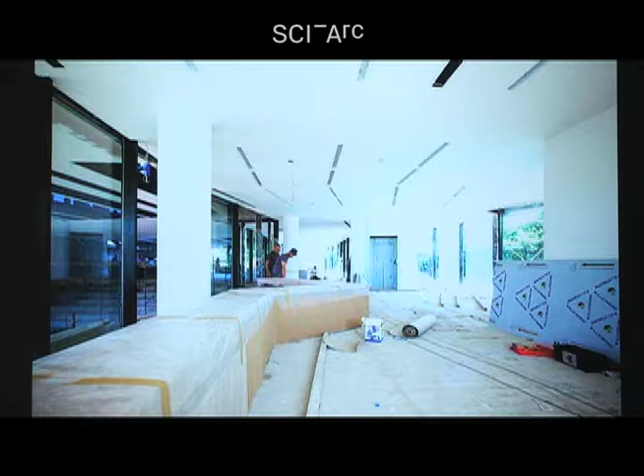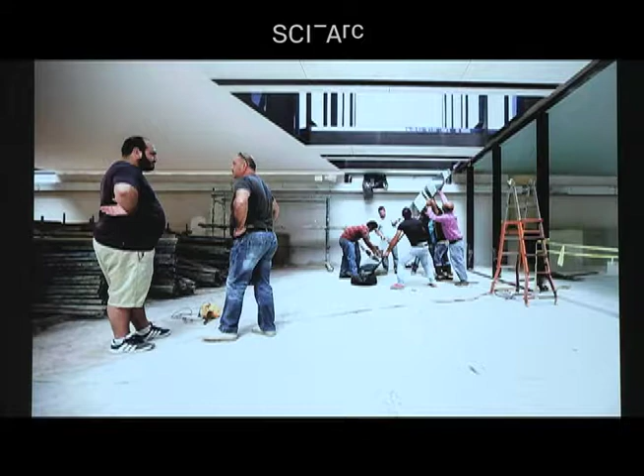I'll just show you a few pictures that were taken two days ago. This is the lobby with the installation of the counters for the staff, putting up the glass that separates the courtyard from the inside. This is the staircase, and this is the testing of a Venetian plaster on the lobby walls, which are going to be also Prussian blue.

This is the site engineer and project manager from our office.

I worry that the public spaces may never be finished, and already I'm seeing some compromises. I worry that the cohabitation between the municipality and the museum may not be happy, learning from precedents of other programmatic cohabitations.

And that the open ground floor would eventually be taken over by the next mayor, who would enclose an auditorium, or even worse, add more offices. But if I can extract at the end of this project a provisional set of premises on which we can move forward, I can say the following 3 or 4 points.

Perhaps instead of deeply embedded buildings or ones that are extremely detached, I'm more inclined towards buildings that transcend their immediate context by being almost grounded, but slightly levitating in the sky, creating a parallel, an alternative, and maybe a better world.